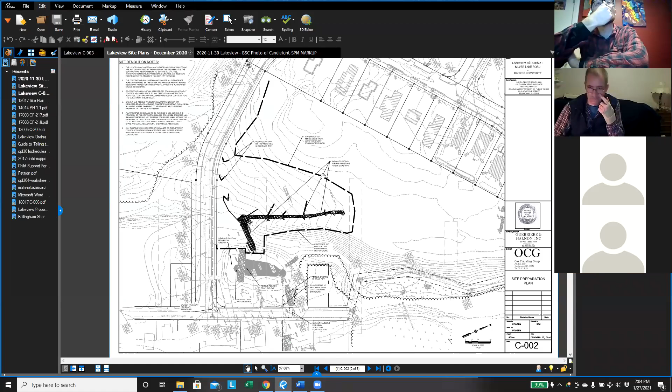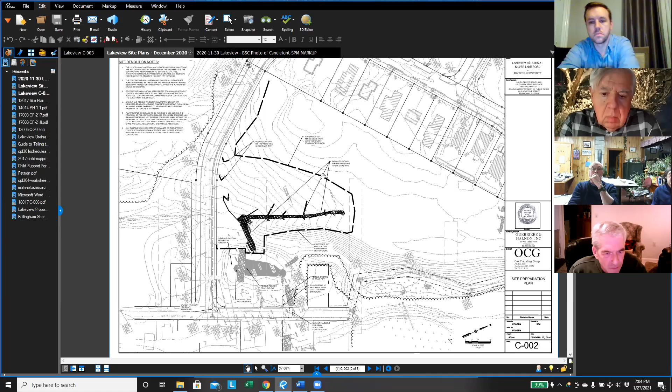Okay, so I'll start with the site prep as the chair suggested. So what this plan is mainly showing is the existing stone swales and riprap channels and stone check dams that were constructed out there as a temporary measure during construction. Those areas highlighted in the darker color, the darker black, are all the existing swales and check dams that will be removed as part of this project.

And once we review that, I'll switch to the proposed plan. We'll regrade the area, smooth it out, create an even slope, about a 10% slope or so. And then we're also constructing a swale along the sidewalk here. The reason for that is, in our analysis and observation in the field, we saw that there's runoff coming from the site onto the sidewalk and then running right down the sidewalk, ending up at the intersection of Candlelight and Silver Lake Road. So we want to take that drainage off the sidewalk and get it to where it's supposed to go.

This area is obviously going to be disturbed. We would re-loam it with screened loam, hydroseed it, and mat it with jute mat to hold it in place. We're showing sedimentation barrier along the uphill edge as well as the downhill edge, which will help prevent run-on into the disturbed areas and help prevent any erosion of the new soil once it's placed.

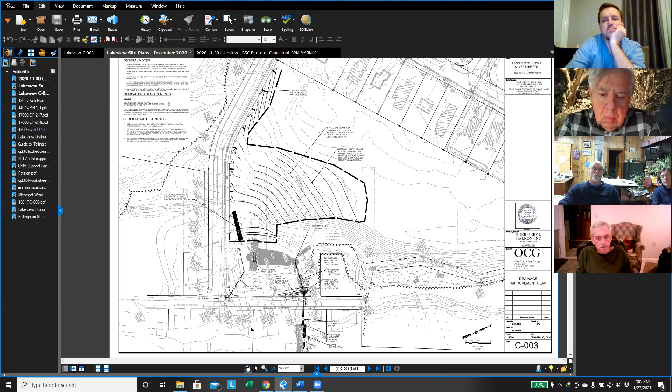Moving into the drainage improvements, we're proposing a new catch basin at the corner of Candlelight Lane and Silver Lake Road. This would be piped to the sediment forebay and into Basin C, helping take the burden off this one structure, which has several acres draining to it. So we're catching the runoff coming off Candlelight Lane and placing this catch basin in a low spot that has seen some ponding, to clean up that area.

We'll be reconstructing the forebay, and right now it's holding water as the commission has observed. So we'll reconstruct it so it will drain, and then lower the berm here by about 1.5 feet, so we won't get as much water buildup there. It doesn't need to retain as much water as it is right now.

The basin has been redesigned to be an extended detention basin rather than an infiltration basin. We observed the groundwater levels in the monitoring wells were less than 2 feet below the bottom of the basin, so it doesn't meet the criteria necessary for it to be an infiltration basin. So we'll add a low flow orifice at the bottom of the outlet structure, which will allow for that extended detention for treatment, settling out any remaining solids after the forebay, but then be able to drain the basin.

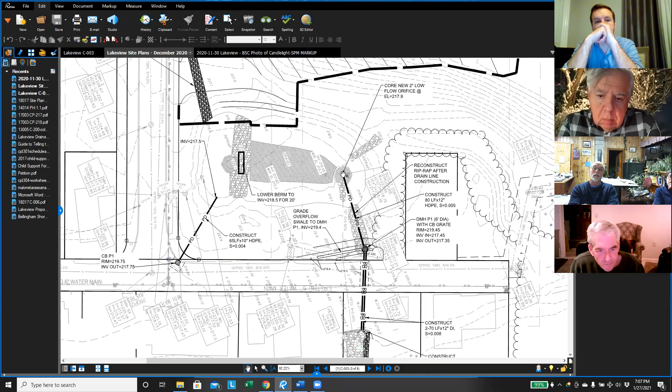And then we'll reconstruct the pipe from the outlet structure to a new drainage structure here. Right now, the basin outlet and the Silver Lake Road inlet, water quality inlet, are connected and share the same outlet. So we're disconnecting those, and from this new structure we'll have two 12-inch ductile iron pipes crossing Silver Lake Road. So in essence, we're more than tripling the capacity of water being able to flow across.

Our analysis showed that in the past, the recent problem was this pipe was just too small for all the water getting down here. That caused ponding and water to well up into Silver Lake Road, and it looked like it passed over into the abutters' land. So we'll be increasing that capacity to knock down all those water levels.

I think this would be a significant improvement. This analysis shows that for a 100-year storm, this catch basin could overflow and would overflow based on the calculations, and then flow down into this water quality inlet.

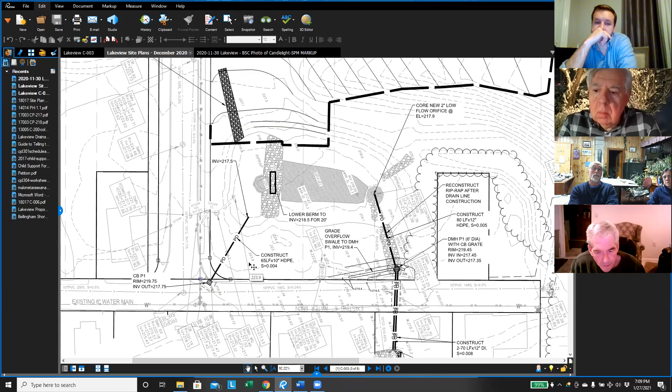This has kind of been harping at me, as well as Howard Fafford. I had some conversations with him last week, and I'd like to, and I'll let the chair tell me when I should do this, show a new plan we've been working on to help address that issue, which I think would be an even greater improvement than what we have proposed now. But that's the proposal you have in front of you right now.

So I'm looking at the inverts, and you've got 4 inches between the rim of the catch basin and where it exits into the basin, is that correct? 217.5 and 217.75, the invert of the pipe. So that pipe is 2 feet below the rim of the catch basin. And then it's a 3-inch drop from the catch basin to the forebay, and that's where the surcharge would occur in a 100-year storm?

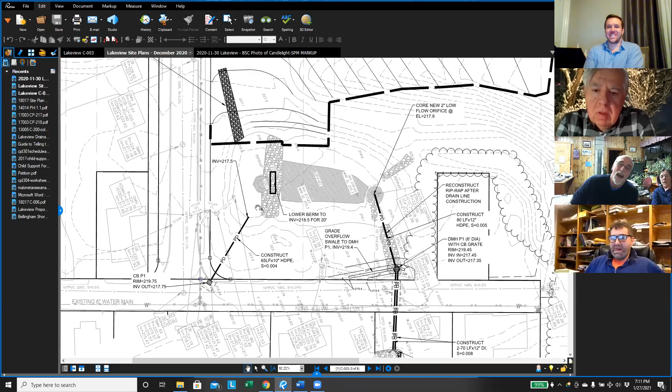Correct. Okay, let me get to the simple stuff first. That structure, it looked like it was going to be an emergency overflow spillway. In the upper right-hand quadrant of the basin, this riprap here. Yeah, I think that's what happens — there's this kind of channel that was built in here. So there is stormwater that flows down this portion of the property and runs along this edge. There's a high side and a low middle, so it's a swale, and it flows up around this property and into the basin. That's why this riprap apron was constructed.

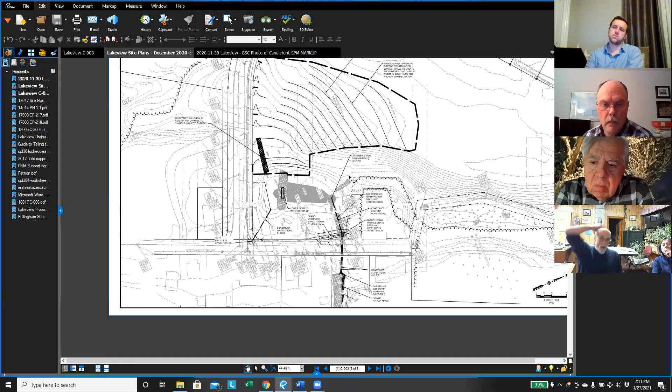So did you factor that into your calculations? Yes. Okay, I missed that. Okay.

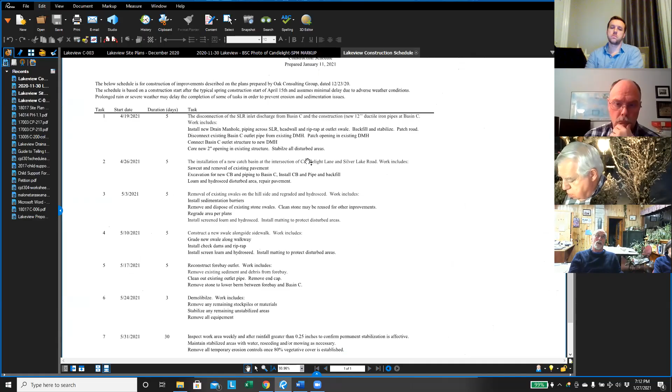So I also have the schedule of proposed work. Just so the commission is aware, when are you proposing to do the regrading and stabilization? One of the things we're concerned about is the limited amount of topsoil used throughout the site for slope stabilization. We need to be sure there's going to be enough topsoil. As part of this project, we've suggested using tackifiers to provide additional protection to keep erosion from occurring. So could you address when you're going to do it?

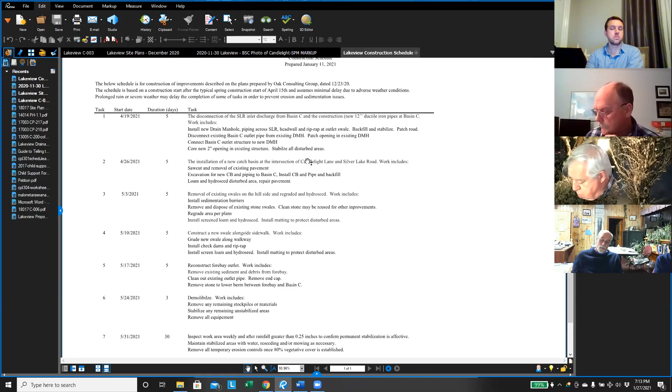That area is proposed to be done at the beginning of May. We would put new topsoil down, 4 inches of screened topsoil, then hydroseeded. What we proposed was matting over it, jute mat to hold it down. If the commission would prefer a tackifier, that seems doable. But with this timing, as long as that area is protected, we also have silt fence around the whole area to prevent additional runoff from entering.

We're really hitting an ideal time for this hydroseed to take hold and grow. I think that's probably adequate. What we would do is get progress reports, and if it looks like we have areas where erosion has occurred, as long as we address them immediately, I think we'd be okay with that.

One thing I'd point out is that with our meeting with the zoning board a couple weeks ago, they gave us a condition to hire, on the town's behalf, BSC Group to provide construction inspection during this process as outlined in the schedule. So they'll be involved as the town's engineer to review and report back to the town.

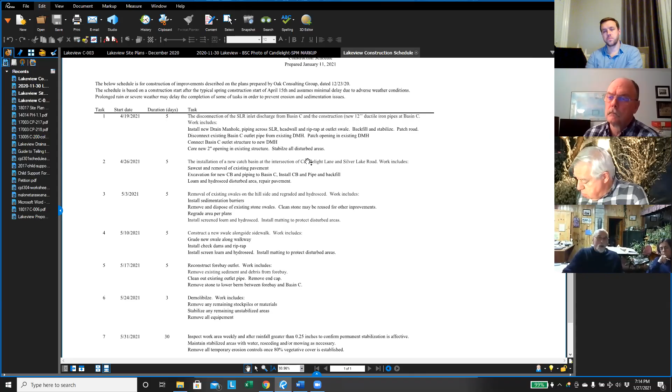Okay, so I had another question back to the previous plan. Now you've got two pipes going into the discharge point on what was previously lot 10, and they're off to the northern side of that swale. I may have missed it, but in your details I did not see a vertical profile. Correct, I have not provided you a profile, but I certainly can do that.

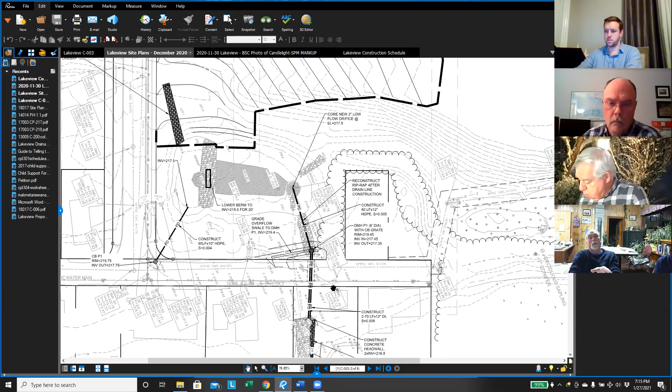I want to make sure, because now what we're doing is putting both discharge points closer to the edge of the swale. We want to make sure the grading there will be sufficient to contain it. Is there any plan to regrade that swale so it's actually level, or is it going to continue to be pitched to one side?

No, we looked at this in the field and the swale was in good shape. It was stable. I'd be hesitant to propose any work there to disturb that area. I think what Neil's getting at is left to right rather than top to bottom as we're looking at the plan. Can you illustrate where that swale is? There you go, there you go.

I think what we found in the field, Neil, was that they had made a previous correction that leveled it off some, but now we'll have an opportunity, when they proceed with the installation of the second pipe and slide that head wall over, you can see the additional riprap being proposed. We'll make sure that from north to south, if you will, the narrow part is level, because at one point it was substantially pitched to the north.

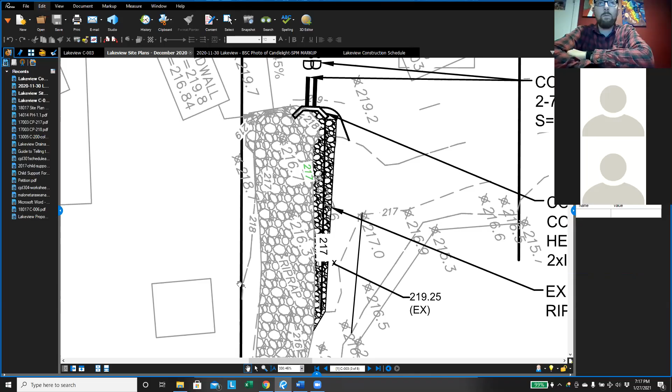Mr. Chair, just so we're understanding, the existing head wall has how big a pipe coming out of it? It was a 10-inch pipe. And we're going to add next to that another head wall with two more 10-inch pipes? Two 12-inch pipes. Two 12-inch.

So we're going with a total volume that's increasing, while at the same time at the bottom end of that plan, we talk about restoring the 25-foot no-disturb. So we're shortening the amount of riprap that's there.

I thought in our site walks, Mr. Chair, that we had talked about the possibility of pulling the whole head wall back to give more time for the dissipation of the outflow of the existing flow we've had. And while it may be coming out slower because of the way it's being repiped, there's still going to be the same volume, if not more, because now we're taking stuff off the road that might have been ponding at the intersection of Silver Lake and Candlelight and putting that into a pipe feeding over there, even if it's not gushing out. I have a real concern that there's just going to be too much water for that when we're shortening the bottom end, and we don't want to get sedimentation up against our newly restored no-disturb zone.

Yeah, and I guess my thought on that, I hadn't heard that before. I don't think that there's any real magic to why the discharge has to be here versus moving it back 20 feet or so, if I'm understanding you correctly, that's what you're talking about.

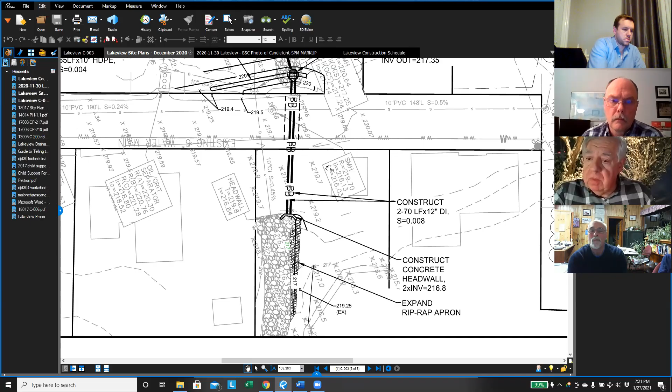So, Mike, I think one of the things that we haven't got to yet, and Sean was alluding to the fact that there might be another change. One of those 12-inch pipes, one of those new pipes, Mike, there is a drain manhole, and there is a catch basin grate in the drain manhole, and that's there at the 220-foot elevation. In the event that there was a surcharge and there was water in Silver Lake Road, it would allow the water to not pond on Silver Lake Road in an emergency condition.

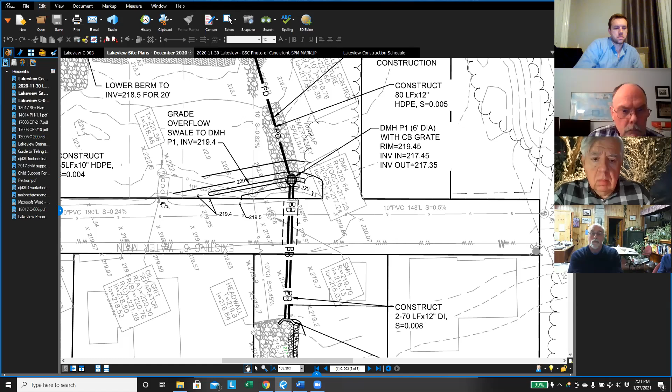Is that correct? That's correct. Yes, because with Silver Lake Road, there's a finite amount of water that's going there now and always has been. The problem has been there's been insufficient drainage to get that water from the street past those houses and into the lake. So we're trying to create a better drainage system to do just that, put more into the lake so it's not ponding up in the road and creating a hazard.

But if I'm reading that right, isn't that manhole you were alluding to just above the north side, or the top side of the street, isn't that at about 220, and isn't the street at about 220 or 219? So isn't it almost basically flat? I don't see how it's going to do much in the way of draining off the road there if it's the same height or almost a little bit higher.

Right, so this manhole, it's about 6 inches lower than the road elevation, and about, I think, three inches lower than the low point of the road. Isn't the far road side around road, isn't the road or the edge of the road around 219, and that manhole just below, it's got a 220 elevation grade right below the manhole there? Am I not reading that right? Yes, you're saying 6 inches below that? So it's higher than this inlet.

So the idea being is during extreme storms, if this inlet was compromised and not draining properly, you would get some ponding here, but you would bypass it. You would relieve that ponding before it extended across the road and into the neighbors' properties. That was the idea here.

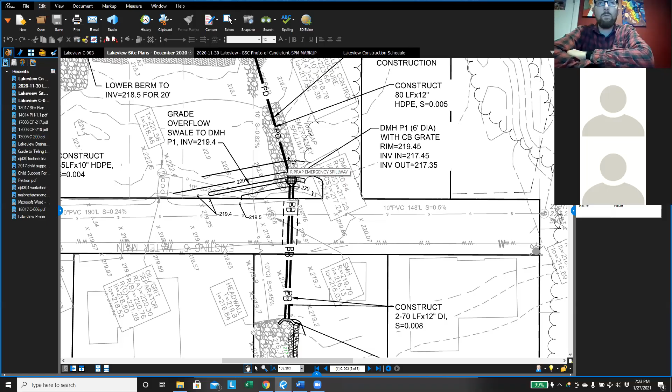Okay, but you'd mentioned a different strategy. Is it related to this? Yes, and why don't I go ahead and do that? No need to keep you in suspense. Okay.

As I mentioned, Howard is adamant. He's calling me every day, saying he wants to make sure this fixes the problem. He doesn't want to be blamed for future issues, and I've got to do everything I can to make sure there won't be any more problems.

So looking at this overflow from this basin, the new catch basin at the intersection of Silver Lake and Candlelight that we had previously proposed, we've changed this to a double grate. It was a suggestion by Frank. There would still be some overflow out of this catch basin in a 100-year storm.

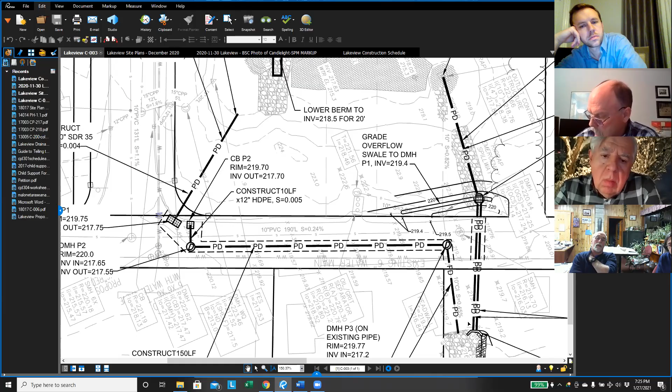So what we're proposing is, one, we're adding a check valve on this outlet pipe so we won't get backflow from the pond into the basin. And if that closes, the water flowing down Silver Lake, rather than going all the way to this single structure, we're going to pick it up just after our catch basin. Or if there's outflow from this catch basin, we'll pick it up before it gets down to this inlet structure, then pipe it across the sewer and down Silver Lake to this discharge.

We'll reconstruct this discharge with a bit bigger pipe, again providing more hydraulic connectivity to get things out of here. So that's what we're working on right now, and I wanted to discuss this with the commission and get some feedback. I know Frank probably needs to see some numbers, but that's our current thought.

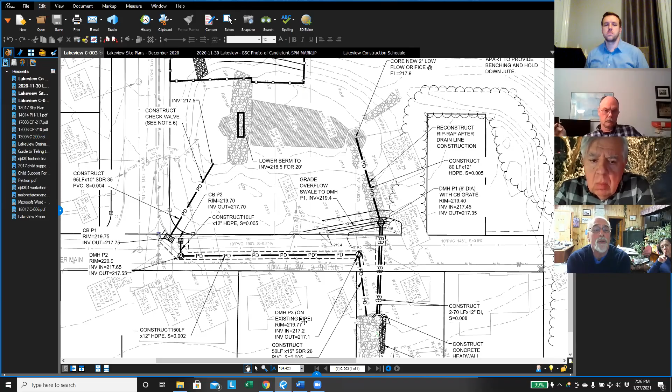Okay, so I've got just a couple of observations, because again we've got a slammed agenda. What would prevent the proprietary structure from functioning? What would allow that to continue functioning? You've got the double grate catch basin - I'm not too concerned about that because you get the pre-treatment in the extended detention basin. But what about the catch basin you're proposing there? Because that would be untreated discharge.

Well, this sedimentation tank really only provides for Mass DEP 25% TSS removal, which is the same as a deep sump catch basin. So it's really the same. But this structure here would really only come into play during extreme storm events. Otherwise, everything flowing down Candlelight and Silver Lake will be caught by the double catch basin and put into the basin, treated and detained, and brought around. So it's really kind of another belt and suspenders emergency relief valve.

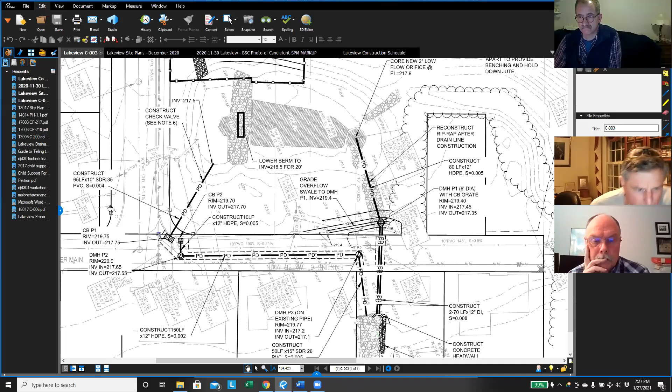It's certainly worth pursuing. I mean, obviously, as you stated, Frank will need to take a peek at the numbers. The concept is essentially that we'd be bypassing that stormwater structure. Under normal storm events, having to go into the extended detention basin provides the treatment we need. I think we'll need to see if Frank is willing to take a peek at that. Do you have any thoughts on this now?

A couple of quick observations - and again, I'd want to look at this more carefully than just an observation on a computer screen. One is I'd want to see what kind of check valve is going to be in there, because if it gets plugged, then it's going to block any water coming in, and that double catch basin might not work. There are ways you can put things in there to make them much less prone to any kind of failure, but that would be something that would concern me.

I'd want to look at the grade change. Looking real carefully, the double grate catch basin, the rim is 219.75. The one next to it is 219.7. I wonder if there might be some bypass, and you could get some water going in there. That being said, as Sean noted earlier, right now the water runs down that roadway and goes into the water quality structure, which is basically a settling type thing - you get the sump and the hood, 25% TSS removal. So I'm not sure that's a major issue, or it's not. It's certainly no worse - it's the same as what's happening right now.

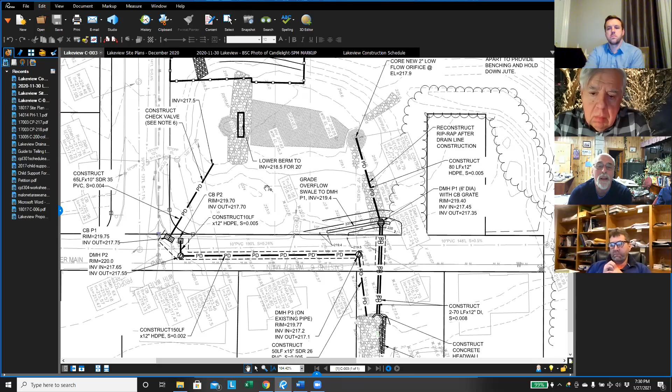Okay, so Sean's gonna get us that profile to make sure that we have the grading there level, from north to south, left to right on the plan. And yeah, because on the plan there I have a hard time picking up the existing head wall.

Pretty light, right in here, mixed in with some of the hatching. It's kind of incognito there. Okay, if you could just darken that up.

But I think, basically, your assessment that it's an improvement is correct. And based on the information that I read from Frank, he concurs that we have a difficult situation and this makes it better. Yes, that's correct.

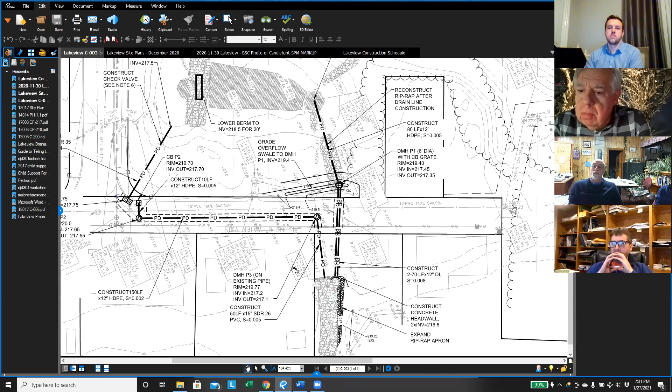So, Sean, if you would proceed with this. Mr. Chairman, I got a couple quick questions, if you don't mind. Okay. You want to get the plan back up?

No, I'm good. So you're going to put silt fence all around the disturbed areas when you reloam and seed it and regrade it, and remove those existing check dams, et cetera? Correct. While the silt fence is in place and the slope is stabilizing, where is that runoff going to go? It'll just kind of pool a little bit behind the silt fence and then drain back around the side of it, or slowly migrate through the silt fence, but you won't get a big rush. And it's not a huge area that's draining to it, so it's just an added little measure.

And the other thing, I had the same concern that Frank did on that check valve. Would there be some sort of maintenance part of the O&M plan to inspect it and clean it and make sure it's operating properly on a regular basis? Yes, we can add that, and I'll get Frank some more specs on it. The unit we're looking at does have a clean out attached to it, extends up. I'll get more information on that.

Can I chime in on the check valve? Sure, Don, can you hear me? That's good. You couldn't hear me last meeting. Was that? Not even on you. I think 'red valve' sticks in my head, but I want it at the end of the pipe. I don't want it in some structure that we've got to worry about maintaining.

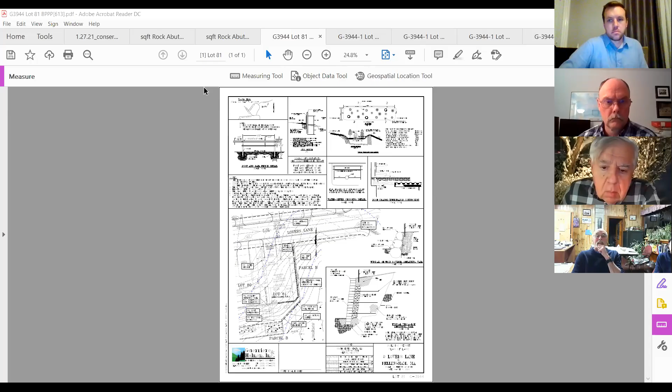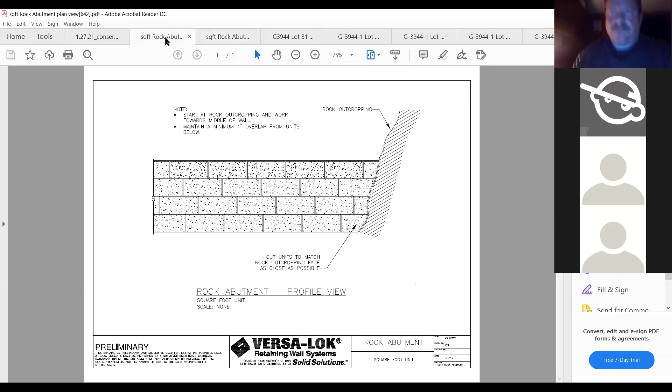So I have here the first detail, provided by Versa-Lok. It's something they can stand by if needed. It's proposed to cut any of the faces of the block to whatever degree or shape matches the irregularities from the boulder wall. Any small gaps in between would be mortared. They also have another detail showing fabric that can wrap around the backside of the wall, as well as the boulder wall, and how those items would meet there.

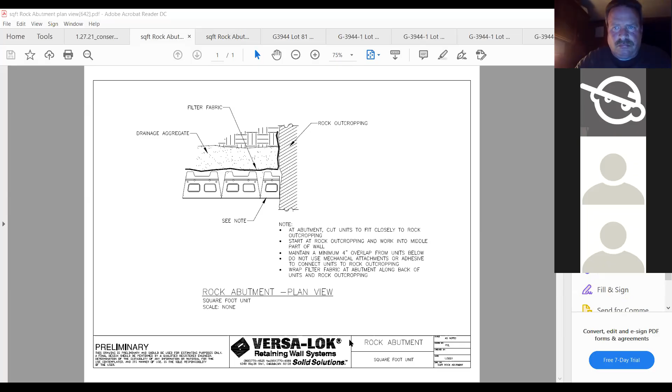As far as photos go, if you do not see those popping up please let me know. We have a couple of examples here of their walls meeting with other natural materials or other constructed walls. Is everybody able to see the images on the screen right now? No? Okay, bear with me one moment.

This is a fairly complicated construction process. One of the concerns Mike had expressed was construction of the wall, the mortaring, and then the backfilling creating movement. Now this wall was designed by someone in your office, Elizabeth Mayanini. Has she experience doing engineered walls before? As far as the wall's design goes, anything smaller than 3 or 4 feet in height wouldn't be stamped by a structural engineer.

As far as these block walls or boulder walls go, that's something that's been used in various applications. I know Liz has proposed those in some situations, and Alex might speak more on his experience with it, but that's something Fafford has constructed with success.

Yeah, this is Alex from Fafford talking. I've actually built around 8 of these walls, and yeah, they are more complicated than just normal retaining walls.

The concern was that we'd start disturbing the open space on the face of the wall, with equipment running in front of it to build it. But the way these are constructed, the engineer determines that every so many courses, 3 or 4, will have a geotextile fabric, like a blanket, designed depending on the load on top of the wall and how deep it is—the deeper it is, the longer the blanket.

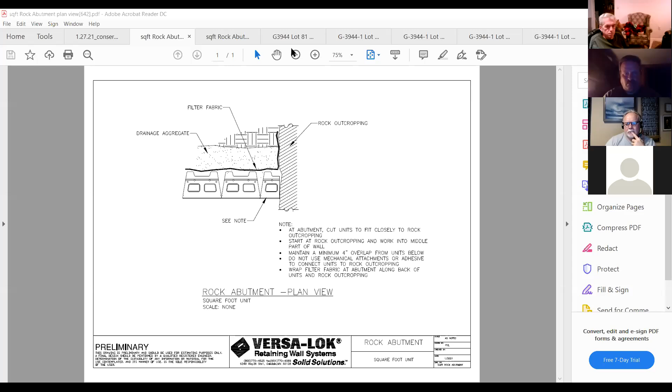So what that means is that the face of the wall, as it gets closer to the top, moves closer to the foundation. And if you're getting a 1/2 inch for every course, and you're up 8 feet, you could be moving in a couple of feet closer.

So yes, it would not be a couple of feet. I mean, block heights are probably at least 12 inches, 10 inches. So we might be looking at it coming back maybe 5 or 6 inches from the very bottom block. It would not be feet in that case. And again, that is something Versa-Lok has no issues with, their geogrid being so close to that foundation construction. Now I see you've got a drain on the bottom in your detail.

Yes, the drain looks like it's running parallel to the wall, and I see you've got aggregate above it, so the drain has to be perforated. This is a typical detail that we have. Versa-Lok would have in their structural plans a more specific design for it. Drains typically with these sort of walls do protrude out the face of them. And as far as any specific spacing for those, I'm not sure. But if there were any specific concerns or locations where you would like us to try to discharge, we can definitely speak with Versa-Lok to accommodate.

I think, Frank, a couple things maybe if I could. On the under drain, if you will, my understanding, my experience has been they'll have a pipe that runs sort of parallel to the face of the wall. And then every 10 or 15 or whatever feet, they'll have like a T-section and a little section coming out so the water can seep out the wall at that location. So I think that would be a detail.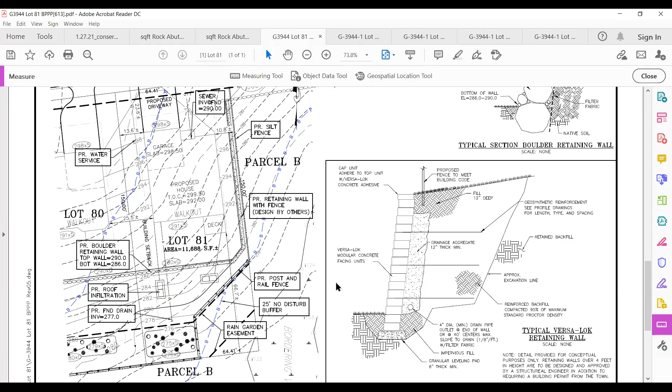Once we pour the footing and foundation walls, we have to do the foundation drain. We don't want to be digging through the mat, so we'd get the foundation drain installed and then work our way up after the walls are poured, everything's waterproofed, and we have the perimeter drain in, and continue up as we go.

Mr. Chair, I got a quick question. So if I'm reading this plan right, and correct me if I'm wrong John, at the bottom, just to the right of lot 81 number, the corner there, it looks like the elevation is roughly 280 that cuts through that corner. Is that reading it right?

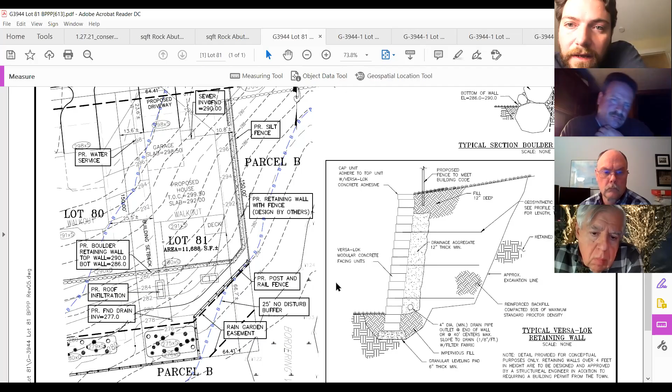It's kind of small, I can zoom in for you all here. Oh, thank you. Oh, a little too close. Oh, sorry about that, a little bit.

Good, okay. So if I'm understanding, Alex, from this description of digging down to virgin soil, would you be digging down to the 280 elevation roughly for the bottom of that wall in that corner, the lowest point? For that wall, it looks like we would have to dig down to 280, yep.

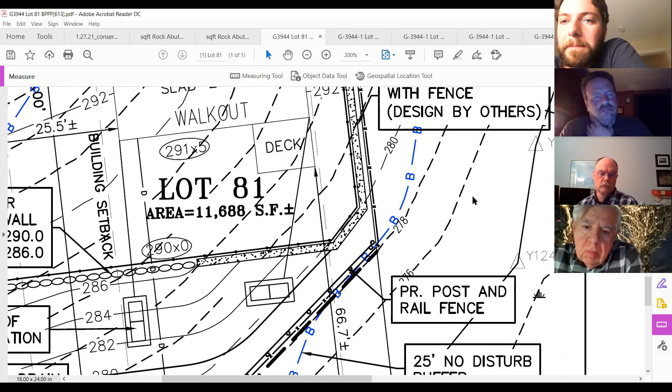Okay, and I'm seeing, if you could back out just a little bit more John. Sure thing. Okay, I'm seeing slab at 292. Is this a basement foundation house or just a slab, ranch style, slab style, whatever they call them?

So from what I'm seeing on here, we have top of concrete 299, slab 292. So the slab is at 292, and then the top of the wall. So it will have a basement, but is the slab the basement floor, or is that the first floor of the house, the ground floor? It would be basement floor in that case.

Yeah, okay, so you're going up 12 feet, building up the wall. After you've dug down to 280 in that corner, you're going up 12 feet in that corner with the Versa-Lok wall, putting in layers or lifts at a time. And each lift is, what, a foot or two? I would believe it would be about a foot.

Okay, yeah. And that would be compacted with any sort of geogrid, and every third block or whatever is specified by Versa-Lok at that point. Exactly, yeah.

So you've got to cut back all the way to the edge perimeter of the house back there over to the deck, I mean, you're going to cut a channel basically. You're not going to clear the whole lot down to 280, I assume, from the bottom of the wall below where it says area and the square foot, all the way back to the house, right?

Well, it depends on the design. If the grid, whatever the grid calls for, because the more load you have on a Versa-Lok wall, the longer the geotextile grid is, so the more you have to excavate. But it'll be towards the house.

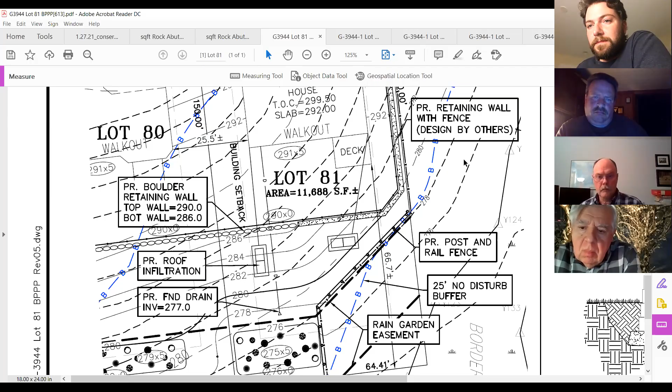Okay, so I just want to picture a little bit of the process, because you do realize, Alex, I don't know if you've seen this before, to the right of the wall where it says PR retaining wall fence designed by others, that's the no disturb zone, right on that side of that fence. You basically are building right to it.

So if you're doing everything on the left side there and you've excavated down 12 feet and you're building this wall up, and you're trying to, as you said, retain all the soil that you're digging out to clear the way to get down to that level, on a sloped lot, I don't see how you can do it. It's not as a flat lot, you can just pile it all up somewhere else on the property.

I think there might be a little bit of confusion about the 12 feet. Since we have it on a hillside, we wouldn't be excavating down the full 12 feet—it might only be a foot or two where the face of the wall would be. Then they'd start laying in the blocks, from my understanding from talks with Versa-Lok, and as they reach a certain height, they'll compact and raise up accordingly. By the time we reach the 12-foot height, everything behind it would be compacted to a solid base, up to the elevation of the foundation.

At some point you'll reach the foundation or slab height, and you'll be compacting in that 10-foot gap between the two that goes toward the road. So you won't need to go over or stand on the other side of the wall—you'll work in that area, compacting to keep the wall lifts working without damaging the foundation, which is going in with concrete.

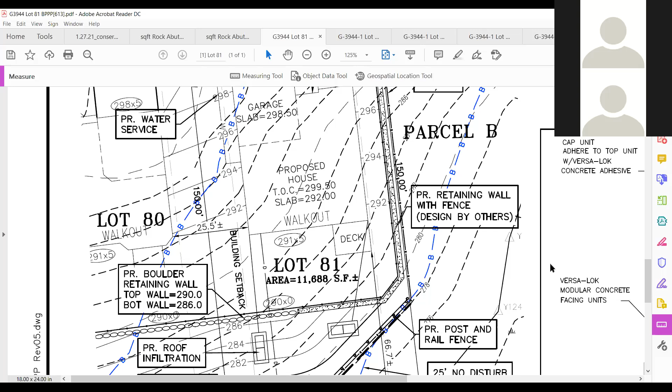Okay, all right, so we're going to continue this until after we have another hearing at 8. Okay, we have a hearing at 8, 8:15, and at 8:45.

So if possible, I'd like to take a look at some of these lots. What are you thinking, 11, 13? 11, 13, okay, 16 and 14, because we've already done the work on these lots. How about number 9, Lover's Lane? What are we doing with that one? We're going to continue that.

We're going to continue this evening to 9:30, and then make sure John understands what he needs to get us, and then continue this into February. So moved. Is there a second? Second. Discussion? All in favor? Aye. Okay, aye.

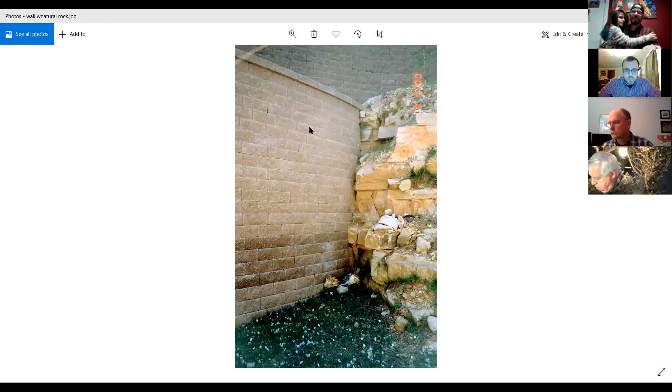Okay, so we have four. I'd really like to get started. I know to keep it straight we usually open them all up at the same time. I'm going to dispense with the reading of the advertisement and open up the continuation for 11 Lovers Lane, Lot 82A. John, if you could put that one up. Sure thing. Oops, sorry about that. No, we saw that one.

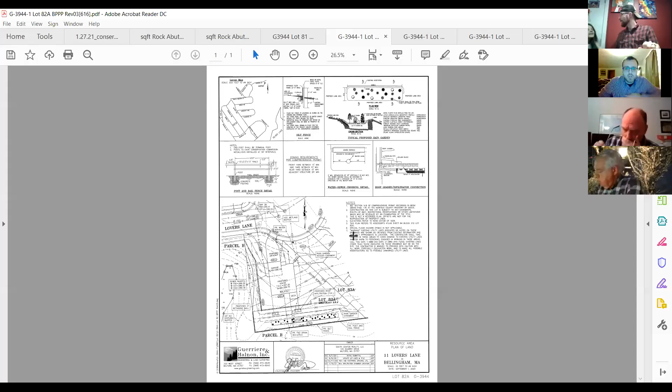So in front of me right now, is everybody able to see lot 82A? Yes. All right, great.

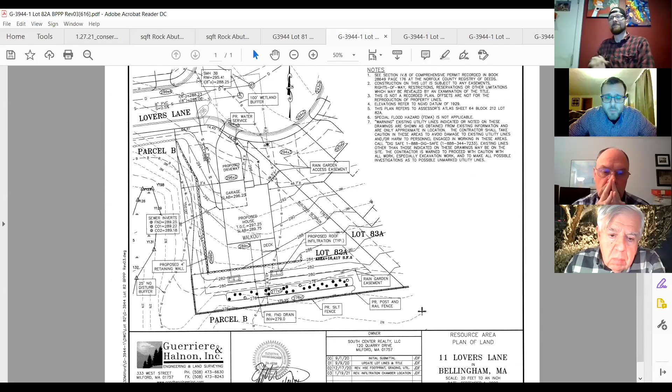Since our last meeting and our site visit, this plan did have the shorter wall, less than 4 feet in height, pulled back several feet from the 25-foot no-disturb buffer. I believe it was 6 feet from the buffer and 5 feet from the silt fence. We were also able to lessen any grades. Per our site visit, we pushed the infiltration units below the wall so we would not have issues with water seeping through or putting pressure on the backside.

This looks a little more manageable. Commission, any questions on this? Okay, we've already conducted one review. We have inspected the site in the field. The changes have been made in accordance with the need to adhere to the performance standards.

If there are no questions, I'll entertain a motion to close the hearing and issue an order of conditions.

I have a quick question, Administrator. Was this one of the order of conditions you sent out with the notes on it, the 14 points or so that were standard for the certificate of, for the order of conditions? Yes. Okay, I think I noticed something on a couple of them.

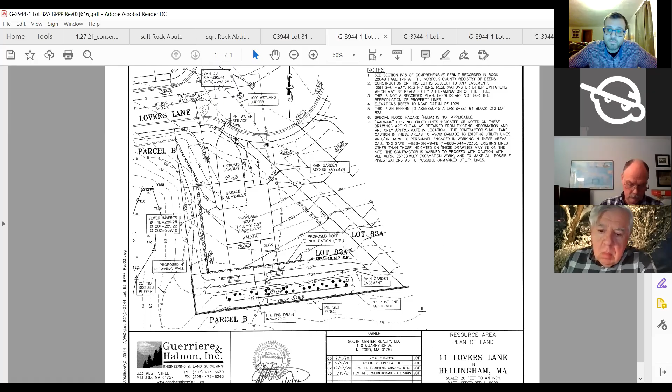Okay, any other questions? Is someone willing to make the motion? So moved. Second. Moving along, discussion? All in favor? Aye. Opposed? Okay, by unanimous vote, I will open up the continued hearing for lot 83A.

All right, thank you for 82. Here we have 83A. This was one of the lots we had on our site walk. We did not have any changes proposed for this one. We just had a very small portion up by the hydrant, which we saw during the site walk, clipping the 100-foot buffer. A little grading was proposed there, but for this lot we are proposing a rain garden to help mitigate any impacts to the parcel B open space area to the south.

We did review this grouping of lots previously. As the applicant's representative stated, there is very limited impact to the 100-foot buffer zone. As a result of our site inspection, we had no suggestions or changes. Any comments from the commission?

Hearing none, I will entertain a motion to close the hearing for lot 83A and issue the order of conditions. So moved. Second. Discussion? All in favor? Aye. Opposed? Okay, that's by unanimous vote.

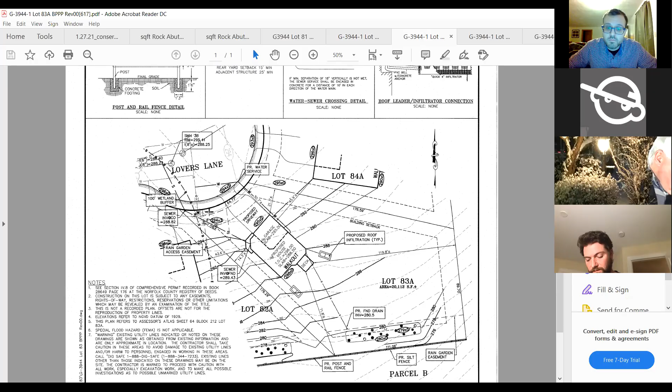Thank you very much. Lot 86, that's across the street. Yes, lot 86: in terms of our impacts, we did have the 100-foot buffer that crosses over where the driveway and some proposed grading is going to be.

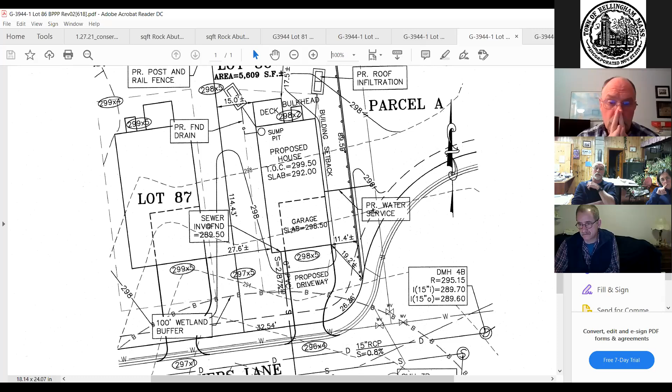From our site visit and some past concerns during the last meeting, we are no longer discharging any roof or foundation drain into the stormwater system. As far as discharging and letting it overflow over the land, we have revisited that, and we will be rerouting any foundation drains to infiltration chambers, increasing their size if needed. We also have the revision with the sump pit moved to the back, with the proposed foundation drain now tying into the roof infiltrators.

So if the commission will recall, we had concerns about perimeter drains tying into the subdivision drainage system, the stormwater management system. We suggested the removal, and they have complied with that.

Again, the only buffer zone impact is to the front of the house in a very small region.

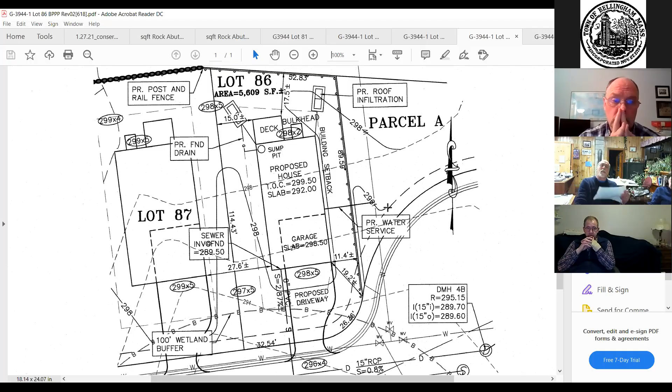Also, I think you should show the fence. We asked for a fence in the back. My apologies for not mentioning that. I do have a call-out located here for the post and rail fence that will run along the backside of 87, backside of 86, and also down along parcel A to separate that. We also have the detail shown on the other plans for that post and rail fence.

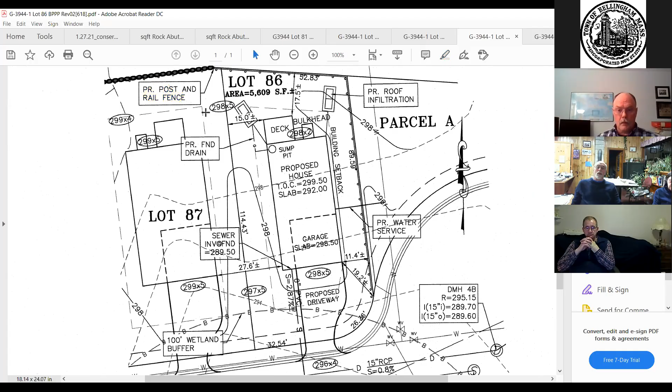The post and rail fence that runs north to south abuts the project's open space. The post and rail fence that runs east to west separates the individual house lots from property owned by the town of Bellingham, associated with the high school, senior center, library, all of that.

Again, this was subject to previous review and physical site inspection. The changes the commission requested to meet the performance standards have been made. Are there any questions?

Mr. Chair, does the town ever require badging of any sort for the backside fence, as you pointed out, along their property? I know we do it for ours, so the right-hand side fence should have it, but would they want to see something on the backside there?

Well, technically, the only property that we place the badges on are either the no-disturb zone or abutting open space that is going to be given or exchanged to the commission. So parcel A would qualify, but not the backside, correct?

Right, this is town of Bellingham land. So I was wondering if Jim or the town has a policy of wanting to post it. Do they post it for when things like this come up?

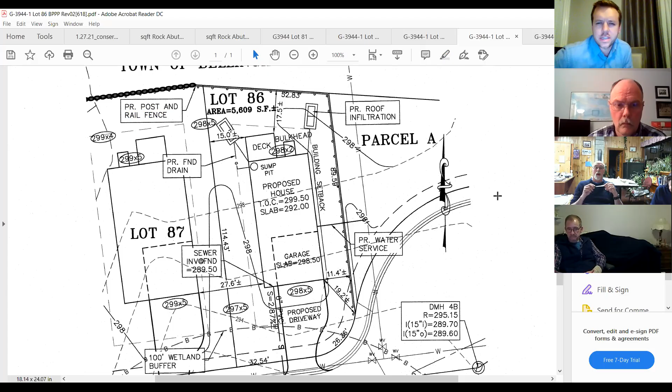Is Jim available? So no, we typically don't post, and actually this location, I believe, is this the access point for the trail to the high school? Yes, I believe that is through this area right along. Yeah, that's the easement, I believe. Yes.

So apparently the town will be creating a trail from the subdivision to the high school. So all the seniors will be heading up that way to class every day, books in hand, cigarettes in the other hand, walking along there. So I think badging probably won't be necessary there. Fine, just curious. First time I've seen town property right next to parcel property recently, and I just thought I'd ask.

Cliff, it's Michael Connor. Can I comment on that? Yes, certainly, Michael. That's the cross-country trail. Originally, the cross-country trail ran onto Fafford land, and where they built that rock wall is the back of the cross-country trail. We do maintain that, and it should be noted as such. We run races there regularly in the fall. Well, Michael, you know my heart goes out to cross country. Yes, okay.

Very good, in that case I think the question is answered. If there's no further questions, I'll entertain a motion to close the hearing and issue the order of conditions for 16 Lovers Lane, Lot 86. So moved. Second. Discussion? All in favor? Aye. Okay, by unanimous vote.

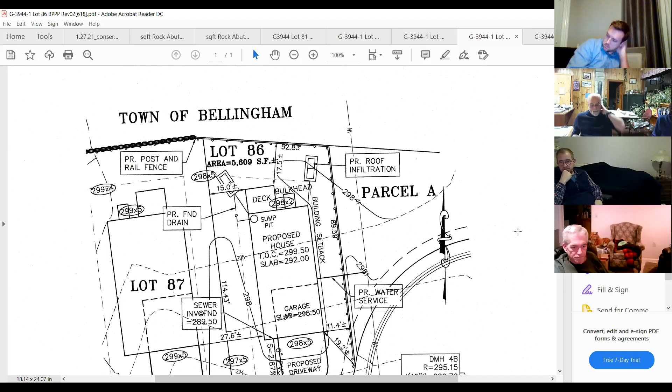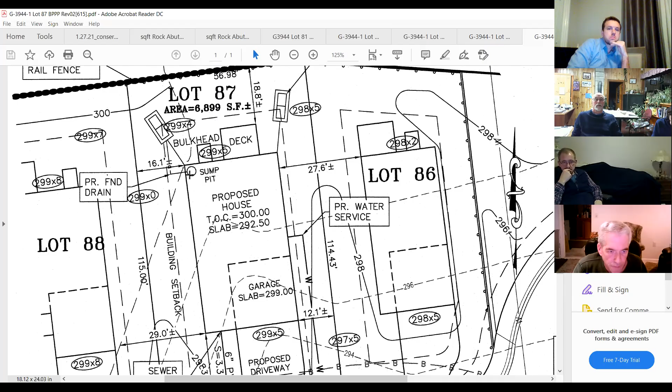One more is Lot 87, the abutting lot. Once again, thank you for 86. And then for 87, similar situation with 86. Again, just a driveway and some minor grading that will be occurring within the 100-foot buffer. We do have a sump pit located in the back with any sort of foundation drain proposed to tie into the roof infiltrator. We are showing post and rail for the portion that abuts the town property. And that was it for any significant plan changes since the last meeting.

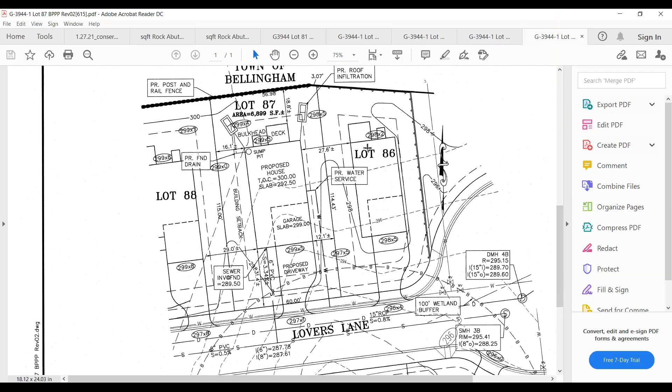Okay, any questions on this one? That being the case, I'll entertain a motion. This is very similar to Lot 86, the one we just did. In fact, this was a grouping of four lots. Much of the homework's already been done. Site inspection's been conducted, and revisions where required have been forwarded to us.

If there's no further questions or comments, I'll entertain a motion to close the hearing for 14 Lovers Lane, Lot 87, and issue the order of conditions. So moved. Second. Discussion? All in favor? Aye. Opposed? By unanimous vote.

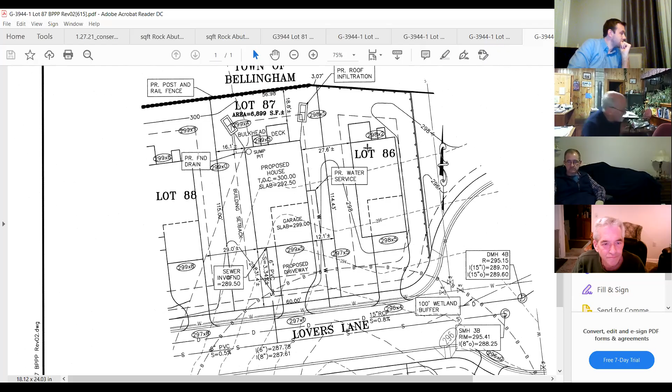Okay, so John, I imagine you'll be sticking around for the continuation at 9:30. Yes, and thank you very much for these lots here. I will be on to answer any further questions or hear anything you have to say for Lot 81 at that point. Okay, all right, thank you very much. All right.

We have volumes and volumes of paper here. Okay.

Okay, I see the applicant's representatives are present.

Bellingham Conservation Commission will hold a public hearing in accordance with the Mass Wetlands Protection Act, General Law Chapter 131, Section 40, and the notice of intent for the proposal to construct a new access roadway, improvements to existing roadways, stormwater management facilities, utility improvements including a pump station located within a 100-foot buffer zone to bordering vegetated wetlands, including proposed alteration of 150 square feet of bordering vegetated wetlands at Assessor's Map 45, Parcel 50, 6 North Main Street, Mill Street, and Common Street, Bellingham. Mark Allen, Allen Engineering, Charlesview Road, Hopedale, has submitted the filing on behalf of Dennis Rain, Bellingham Town Administrator, 10 Mechanic Street, Bellingham. The continuation will be held online via Zoom on Wednesday, January 27th at 8:15.

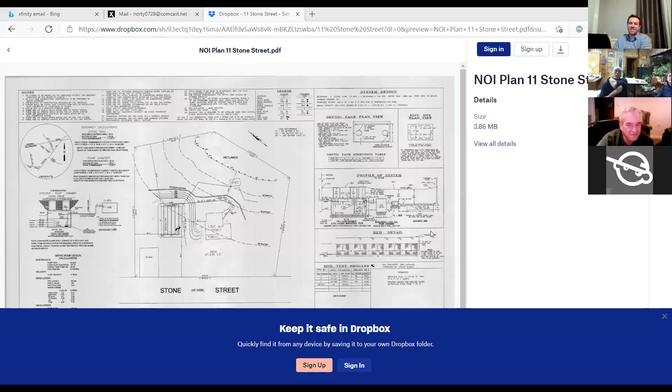I have it. How we doing? I have it up, okay. Jim, would you let Brian share his screen so we can take a look at this plan? Wrong one. Hold on one second, it's okay. Here we go. Yeah, I'm not having much luck here. Don't worry, Brian, we got all night. No, we don't. There we go, can you see that? Yes we can, thank you Brian. Appreciate it. Sorry, close that blue bar though, and the sidebar, you'll make it bigger.

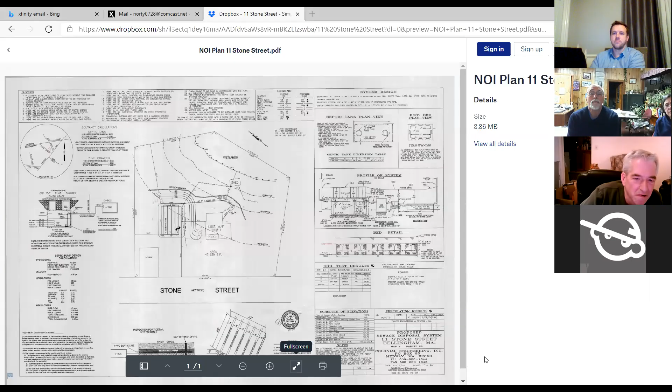So does everybody know where we're talking here? This is Stone Street? I had a question - when I was looking at the other plan included, between the houses there and the houses on Beach Street there are wetlands. Do you remember when the town improved the drainage? Oh yeah, I remember that. I just didn't realize there's wetlands between the two rows of houses on those streets, since they're not far apart.

My guess is that 150 years ago it was an open field with a stream running through it. They put in two roads, built houses on either side of the stream, and a section 50, 60, 70 years ago was actually piped behind a couple of those houses. But when the town did the drainage improvements on Beach Street, we verified the wetland delineation on the other side of this particular wetland, and that's the location.

I think we had a septic repair somewhere along this area. It was an abutting house - that was Leonardo Bosch's daughter? No, that wasn't a septic. I could've sworn we've had a couple of septic repairs on Beach Street and Stone Street. That's correct, because of that brook - I don't think the systems do very well down there, high groundwater. And the brook had that beaver dam problem the town had to deal with, further down under the culvert on 126.

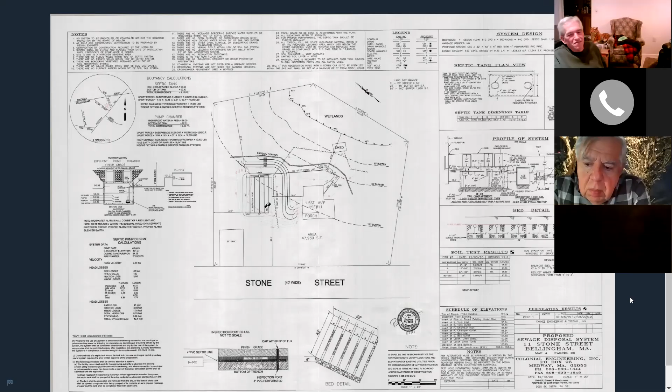So that was accurate. For the location of the septic system, they're proposing using the existing tank and then putting in a pump chamber and pumping it. No wait - Cliff, can you hear me? Oh, it's okay, it's Paulie Simone. Good, let him do it. Yeah, I've been yelling, no one heard me.

It's a new 1,500 gallon tank. Oh, okay. Should I explain it all? Yes, would you please explain it, Paul? Thank you, sure, no problem.

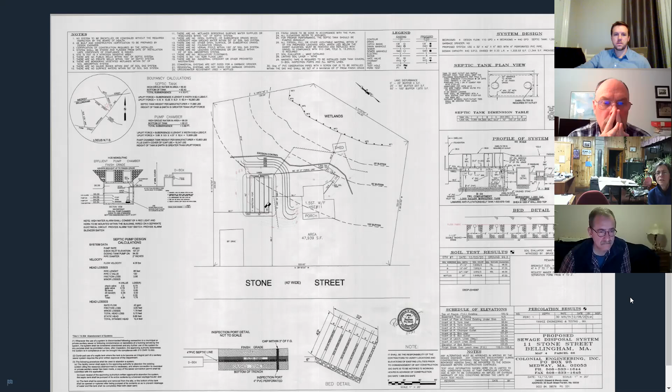So you've already walked the wetland line - when you guys were out there, did you see the stakes for the septic systems? Because we did stake it out on the ground. I don't recall seeing... Okay. You saw the test hole area, correct?

Yes, okay. So we're trying to keep the system as far away from the wetlands as we could. We have a hill there - you can notice the top of the hill is like 104 and it steps down. So we did the test hole at the bottom of that hill, which means we have to grade. We're actually just pushing the hill out and grading over it. If we had gone into the front yard, we'd have a massive mound there.

So we're using the pipe, it comes out in the same spot - the old tank is roughly in that same area, but we're putting in a new 1,500 gallon tank with a pump chamber and then pumping it up to the system. It's a large system, we couldn't do a perk test - we had to send the soils out because the water was pouring into the perk hole.

That's what we saw, that's exactly what we saw, Paul. Yeah, it's a really high water table. We tried a hole to the right of the house up in that area - it seemed to be nice gravel, but that water table was down 2 feet also, and it's flat right there. So again, we'd have a massive mound. So this gets rid of the mound, it tucks into that hill pretty decently.

And you can see the wood line on the plan - are you guys looking at the plan? Yeah. The shed's kind of into the woods a little bit, and the line comes to the left off the shed and curls around. So it's in a wooded area, but it's kind of all small, scrappy stuff, not a lot of big trees.

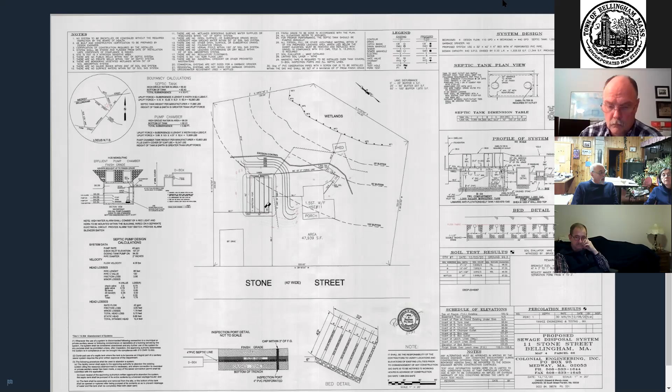Okay, so I will entertain a motion to close the hearing and issue the order of conditions. So moved. Second. Discussion? All in favor? Aye. Okay, by unanimous vote.